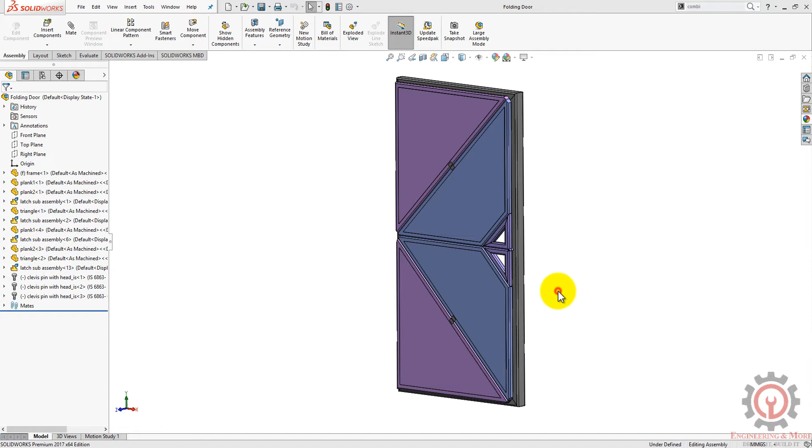Hello and welcome. In this lesson, we will create this plank for our folding door.

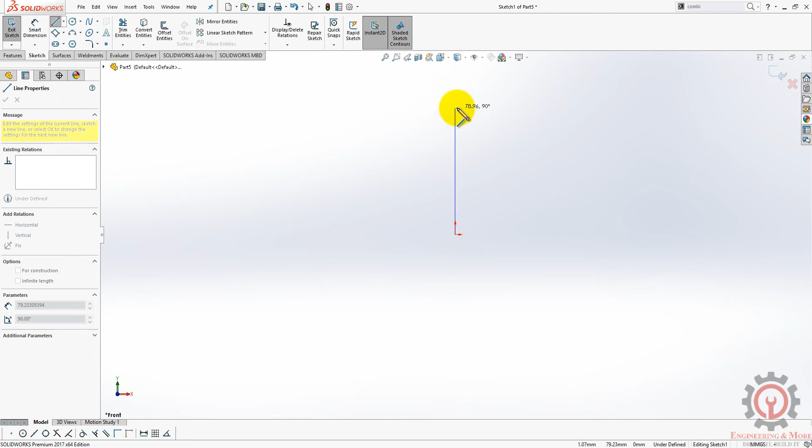Create a new part document, sketch on the front plane, and draw a right angle triangle. These two lines would be equal in length. The length would be 991.72 millimeters.

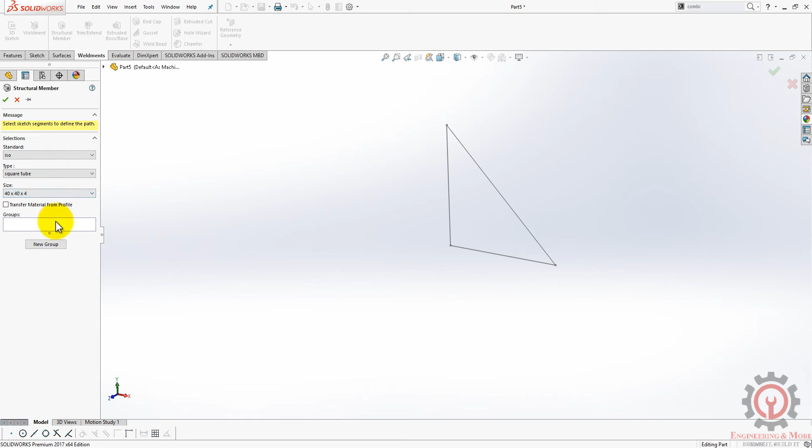Go to weldments and select structural members. The standard would be ISO, type would be square tube and size would be 40 by 40 by 4. Select all the three lines and press OK.

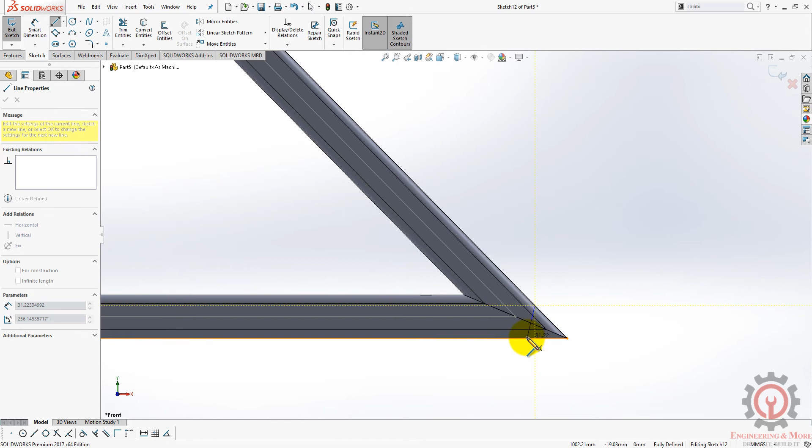Sketch on the front plane again. Convert these two edges. Draw a random line. The distance between this point and the edge is 35.36 millimeters and the distance between this point and the edge is 25 millimeters.

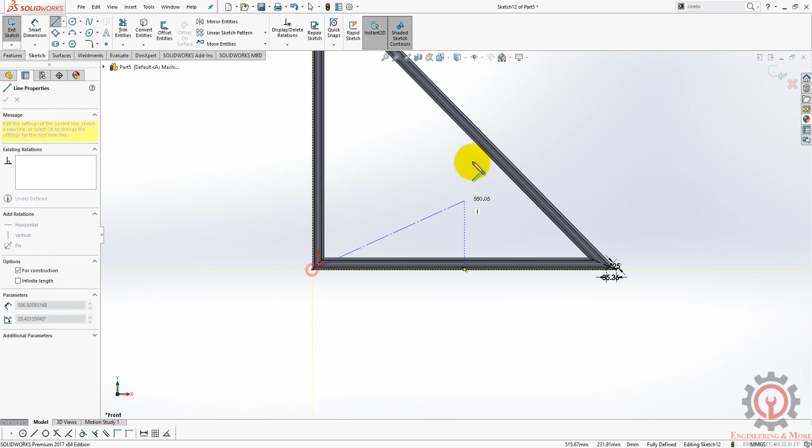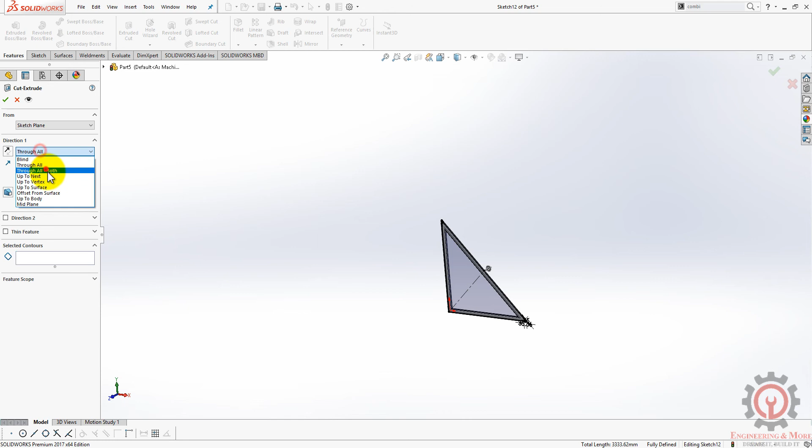Draw a center line through the middle of the triangle. Mirror these lines with respect to the newly drawn center line. Select extrude cut through all, both sides, and the selected contours would be the newly drawn small triangles.

Hide the sketch. Go to surface and select fill surface. Select all the edges here and press OK.

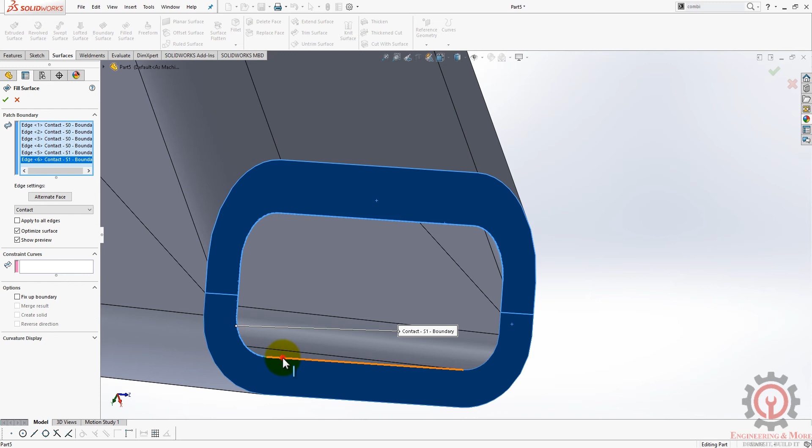Now go to knit surface, select the newly formed surface and these two planes, merge entities, and press OK.

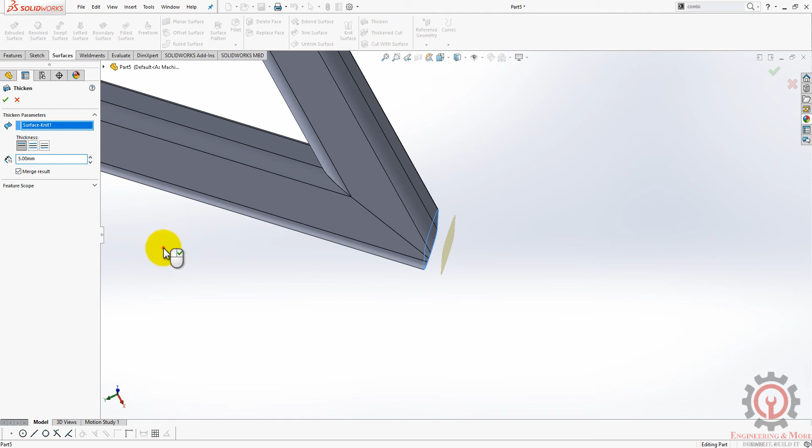Now we will thicken the surface. The thickness would be 5 millimeters and we want the thickness to be inside. That's why we are selecting the third option here and press OK.

Now we will repeat these three steps for the other side also.

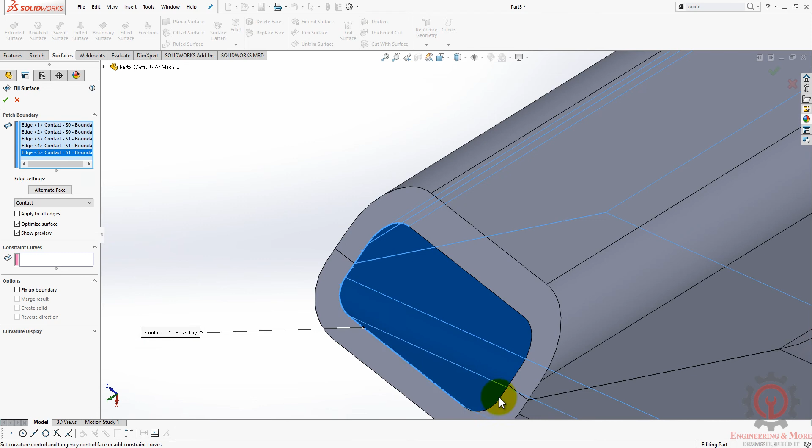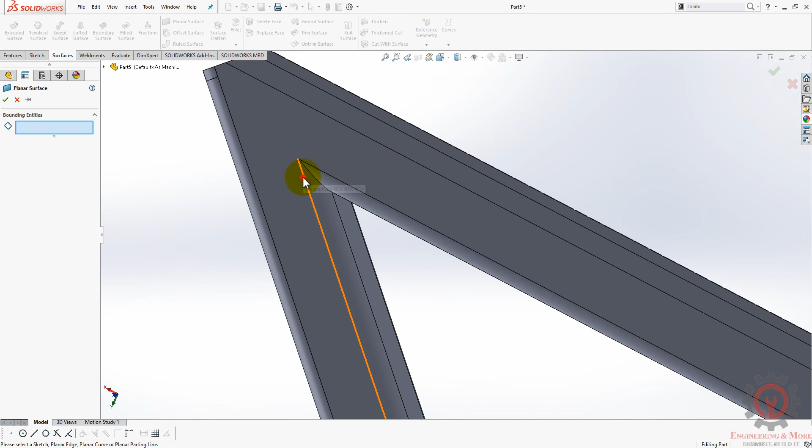Go to planar surface, select these three edges and press OK.

Now thicken the surface. The thickness would be 2 millimeters. We want the thickness to be on this side, and that's why we are selecting the first option here.

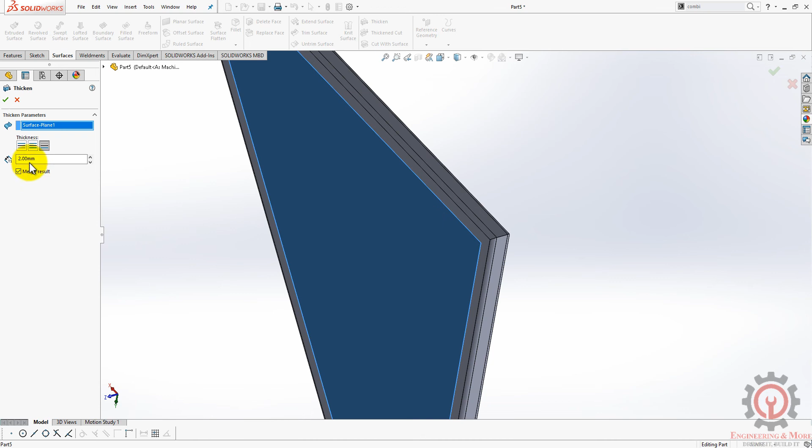This is the result we are looking for.

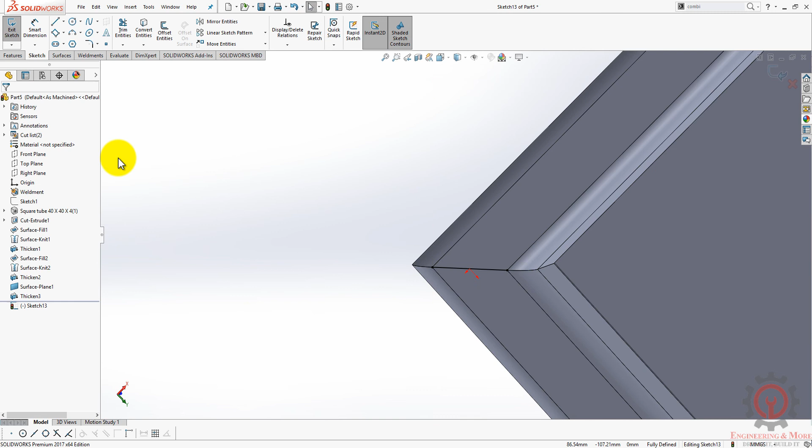Now we will sketch on this plane. Draw a line connecting these two edges. Now at the middle point of the line, draw a circle. The diameter of the circle would be 10 millimeters.

Now extrude cut 10 millimeters, blind. Now we can color the part if we want.

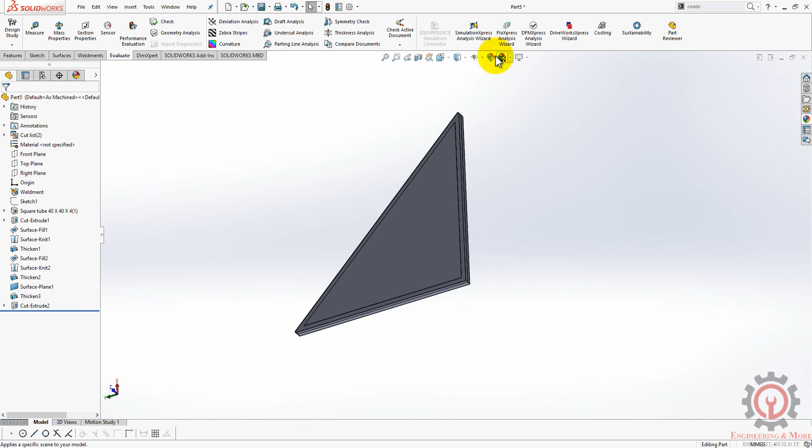And finally, save the part with a proper name. Thanks for watching. See you in the next lesson.